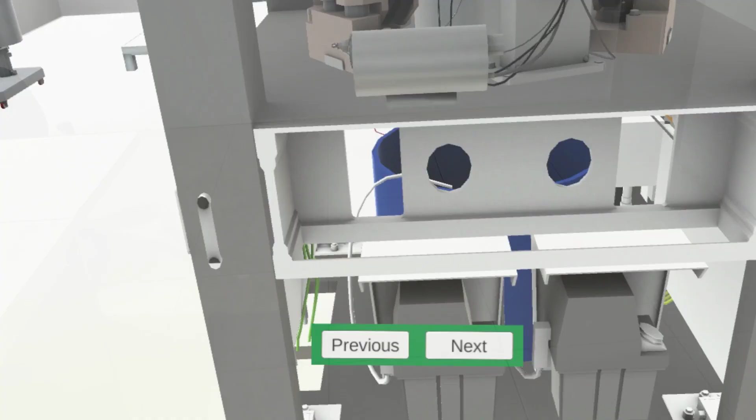After the removal of the dust caps, dip to submerge the clamps, dust caps, gasket below in the SS container, which contains the potable water.

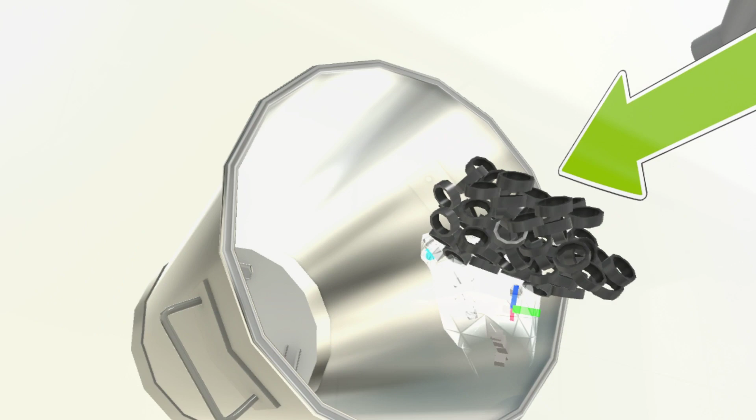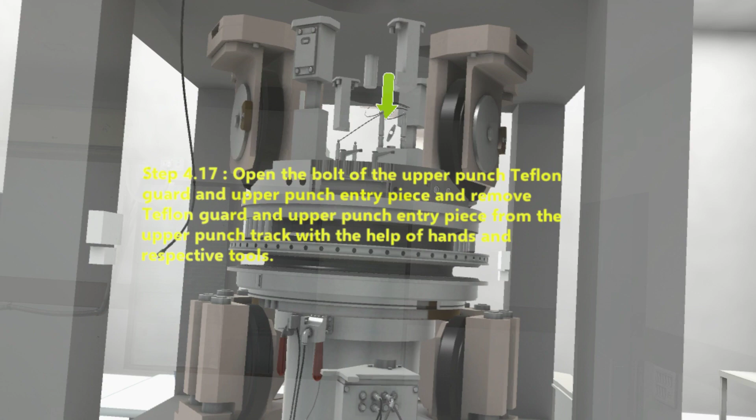Open the bolt of the upper punch Teflon guard and upper punch entry piece and remove Teflon guard and upper punch entry piece from the upper punch track with the help of hands and respective tools.

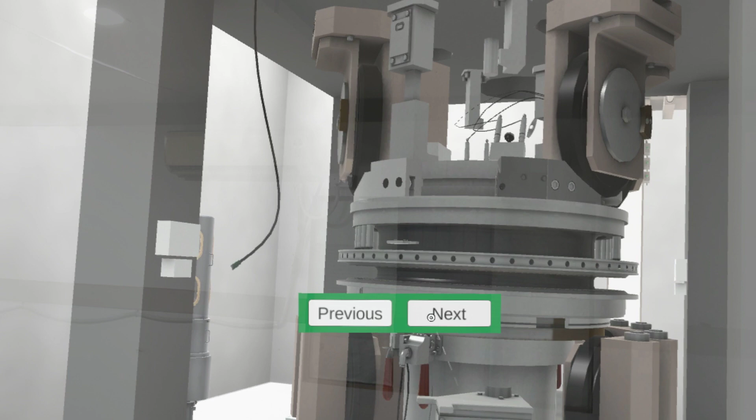Remove all the upper punches one by one and rotate the turret with the help of the respective tool. Keep all the upper punches at safe place after removal.

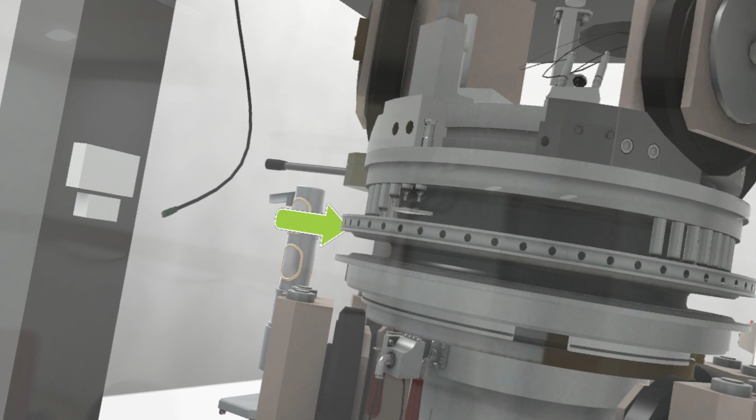Remove the lower punches from lower punch track by rotating the hand wheel. To remove the lower punches, we require to rotate the turret. That can be done by the turret hand wheel. By rotating the wheel, remove all the lower punches and place them on the table.

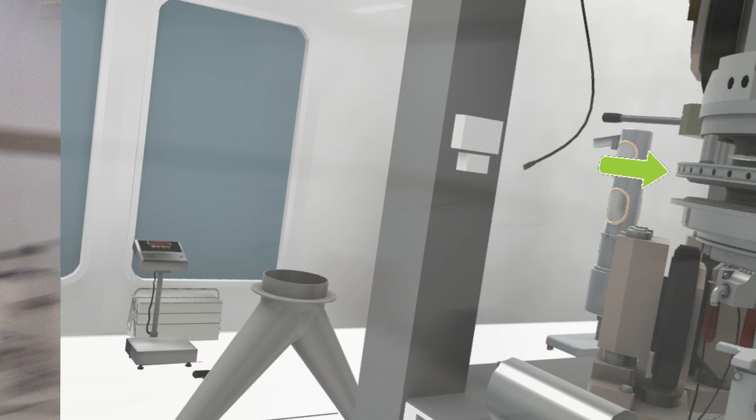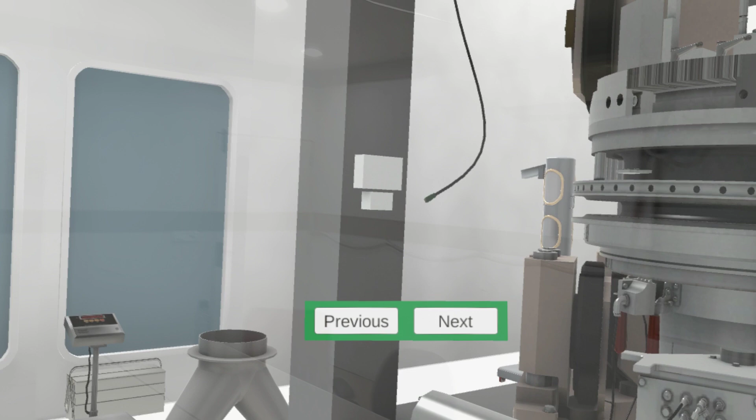After the removal of the lower punches, remove the die table by loosening the die locks and collect the accessories in poly bag.